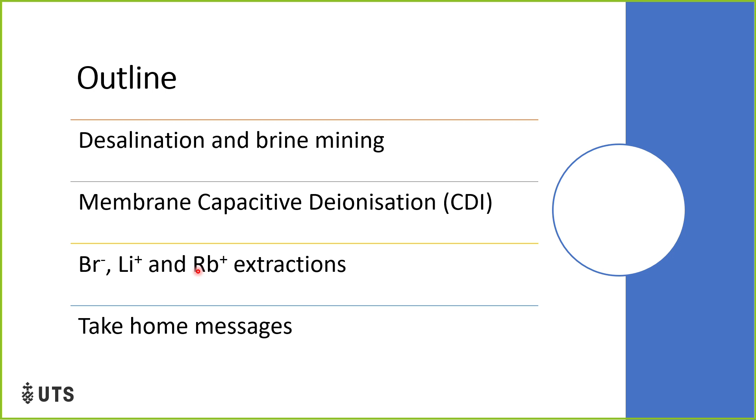Everybody knows seawater is a reliable water, food, mineral and energy resource. We have a lot of salt dissolved in this seawater. Seawater also functions to maintain oxygen levels of the air - a lot of people mention the Amazon as one of the lungs contributing to oxygen concentration, but seawater, because of the seaweed, contributes more than 60-70% of the oxygen. So seawater is very important for our CO2 balance, as well as providing a lot of benefit to our lives.

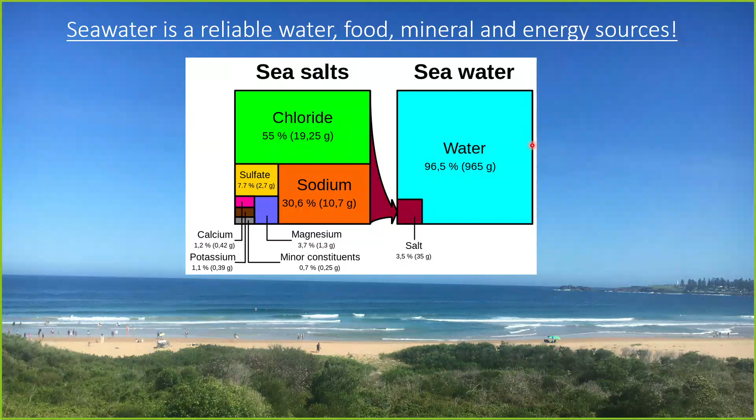If you look at the concentration, sodium chloride is followed by calcium, magnesium, sulfate, and a lot of minor constituents. So the question is how we can recover this material and also desalinate, which is one of our sustainable water resources.

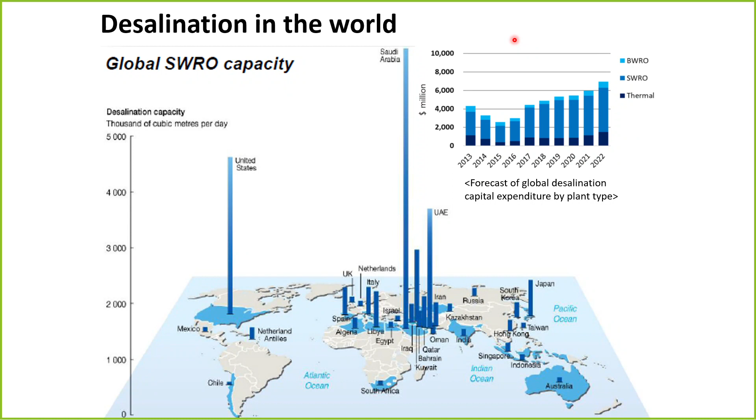If you just save 1 kWh, it will really impact our overall CO2 emissions as well as energy consumption. So there is a lot of effort to develop more sustainable and cost-effective desalination. And if you have a desalination plant, there is seawater and seawater brine left after the water is desalinated - so there's still a lot of leftover material.

Sodium, calcium, magnesium, and different monovalent ions are in brine. This brine can be mined and converted to useful material. The brine water can simply produce calcium carbonate, and these can also be separated with nanofiltration technology, which can separate multivalent ions from monovalent ions, allowing us to recover magnesium hydroxide.

There are also a lot of useful materials like indium, vanadium, and gallium, and we can collect these useful elements from brine. We can utilize polymer inclusion membrane selective separation, 3D adsorption modules, and solvent extraction methods. Ionic liquid can also be used.

If you look at the monovalent ions, we can use advanced multi-effect distillation to get further desalinated water, and then the remaining monovalent ions can be extracted further using solvent extraction, polymer ionic membrane and 3D adsorption modules, and electrodialysis with improved ion exchange membranes. Ultimately, we'd like to collect rubidium, boron, lithium, and other byproducts.

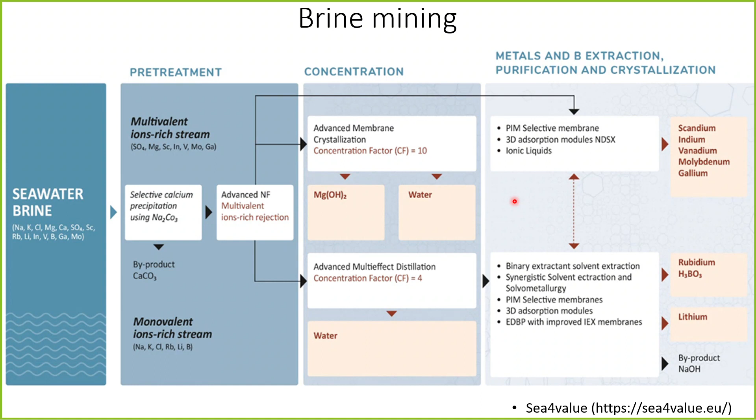We can collect useful elements from brine, which gives extra income from the desalination plant, so that we can cover some of the very huge expensive capital and OPEX costs. So if you look at the detailed minerals, which kind will be more cost effective to recover?

This red zone shows rubidium, lithium, bromine, and magnesium are the most viable elements to collect from RO brine. In particular, magnesium is very simple compared to other monovalent ions because it can be separated by nanofiltration. Sodium, magnesium, and different ion balances can be separated by nanofiltration membranes.

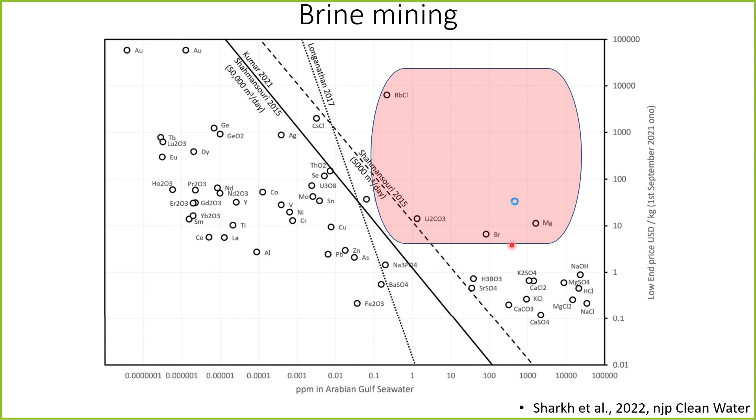I don't want to discuss nanofiltration in detail. This nanofiltration separation has already been commercialized by Neom, and they are actively collecting this magnesium compound. Today I'd like to focus on rubidium, lithium, and bromide, and how we can recover these three elements using membrane capacitive deionization.

So briefly, let me introduce capacitive deionization. This is an emerging technology, highly suitable for low salinity conditions, relatively fast process, efficient removal of charged ions, ideal for decentralized small-scale systems. We have a graphite sheet and carbon electrode, which is powder activated carbon, and a spacer, which is the water channel, along with an electrode and a graphite sheet.

We apply direct current, plus to minus, and then you can separate your ions. This is membrane capacitive deionization. We just attach the cationic membrane and anionic membrane to pass through ions, and positive and negative ions can be collected from this electrode using very low voltage and low pressure, chemical free, and this can be separative, and we can also have a desorption stage.

Using short circuit and reverse polarity, or chemical pre-process and energy recovery, we can also focus on resource recovery, achieved through this MCDI system. There is a lot of research going on to develop better electrodes, such as carbon aerogel, graphene material, or MXene, which can be utilized as good electrodes.

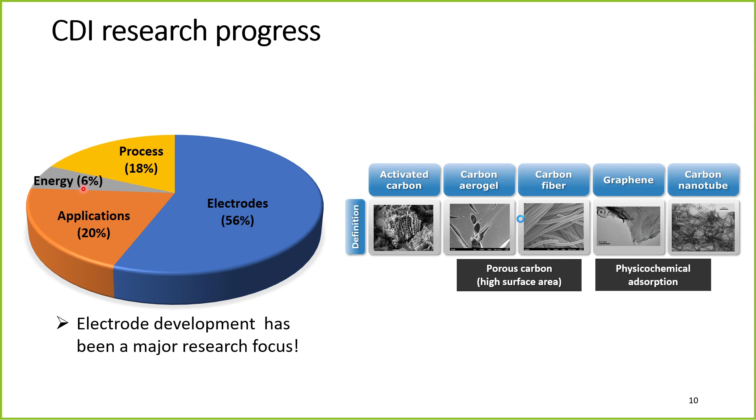Also on the application side, there's focus on energy saving as well as process improvement. This is the application: people try to apply it to brackish water, to make drinking water quality less than 500 milligrams per liter. Also water softening to remove some of the calcium and magnesium, and to remove arsenic.

Some contaminants like arsenic, or specifically nitrate in groundwater, are less tedious, but the problem is that toxic heavy metals and nitrate compounds can only be removed specifically using this MCDI technology. So this is the more cost-effective process.

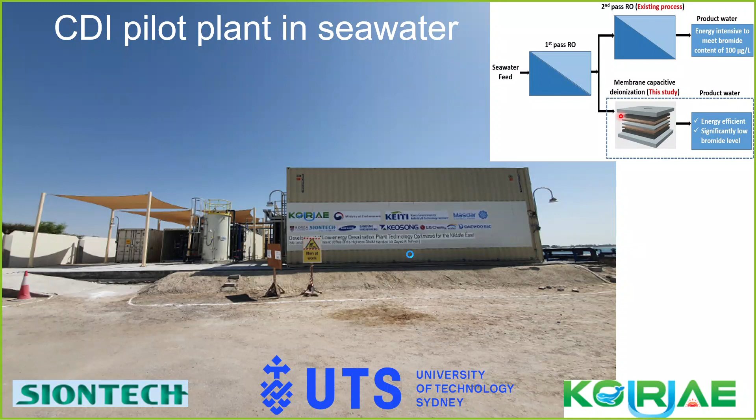We collaborated with a Korea project to demonstrate seawater desalination after the first RO pass, connecting with the second pass RO. This is the general RO process, and we tried replacing this second RO pass with MCDI, saving almost 0.3 kilowatt hours per cubic meter, a huge amount of energy. We demonstrated this at 1,000 cubic meters per day of energy-efficient desalination in the Arab Emirates, and successfully installed and demonstrated this process.

We are also helping bring this MCDI technology with solar panels to Tuvalu. Tuvalu is located in this area, and they have significant impact from climate change and sea level rise, with seawater penetrating the groundwater, so drinking water is not enough.

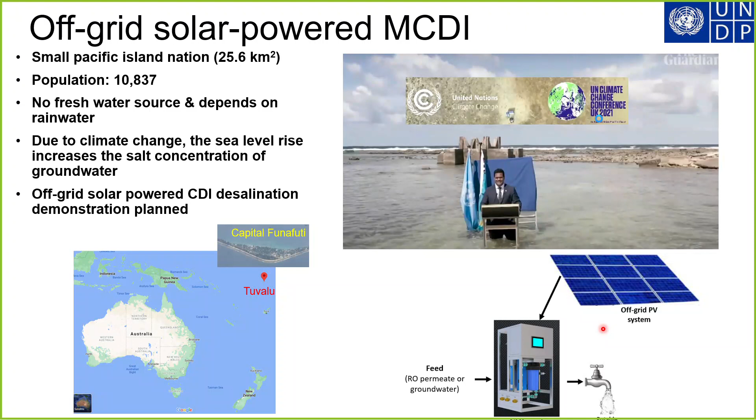So we try to connect PV panels with seawater RO and CDI process to provide carbon zero desalination technology. And the first challenge, as I mentioned, I tackled the three element recovery in this study.

The first one is the bromide. We have published around 10 papers over the last 7 years to recover this bromide. The bromine market is valued at USD 3.6 billion, growing 5% between 2021 and 2026, and will reach 4.5 billion by 2026. It's mainly used in dye production, flame retardant, pharmaceutical, agriculture chemical, insecticide, and pharmaceutical chemical intermediates, so there's a huge amount of bromine utilized.

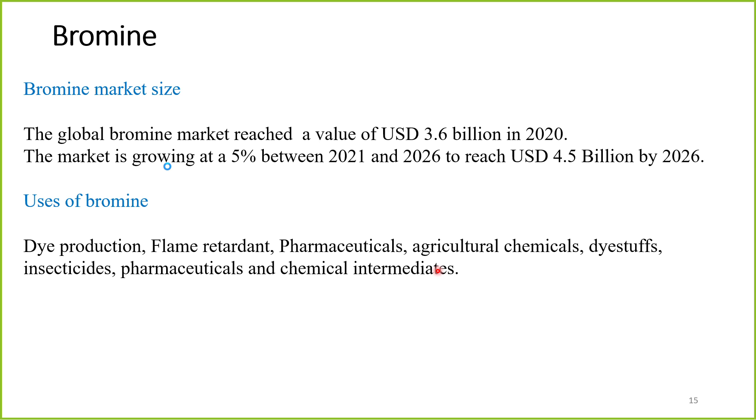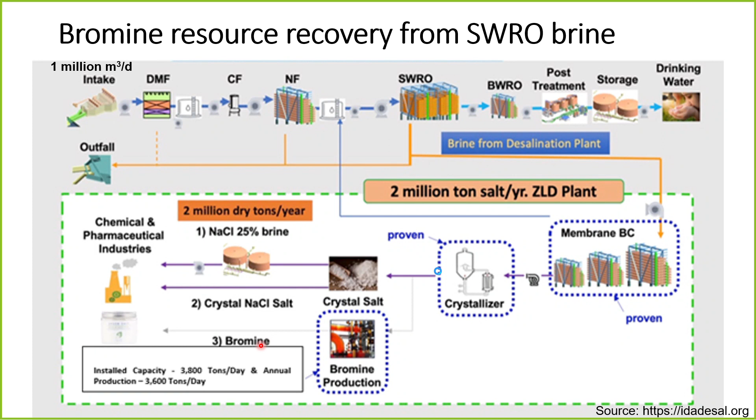So what we try to do is recover bromine at this stage. This is the schematic from Neom City - they'd like to commercialize this technology. First they want to collect 1 million cubic meters per day of seawater intake, with pre-treatment nanofiltration to recover divalent and trivalent ions, while monovalent ions pass through the seawater RO, BWRO, producing drinking water. At the same time, they collect the divalent and some monovalent ions to pass through a membrane brine concentrator and crystallizer to collect the bromine - almost 4,000 tons per day, a huge amount, but they still have technical issues effectively recovering it. So we tried to combine our MCDI to improve bromide removal.

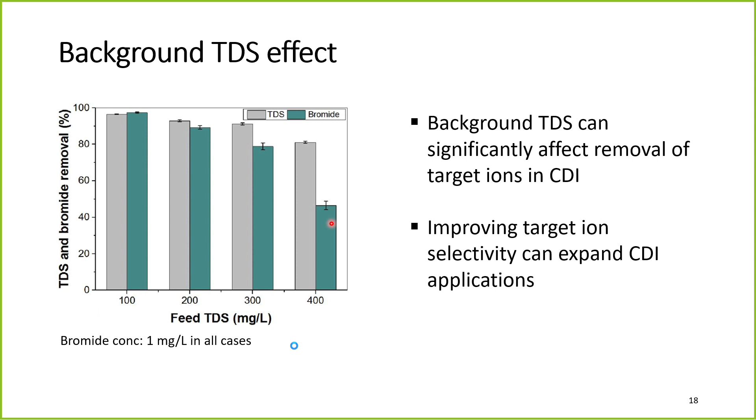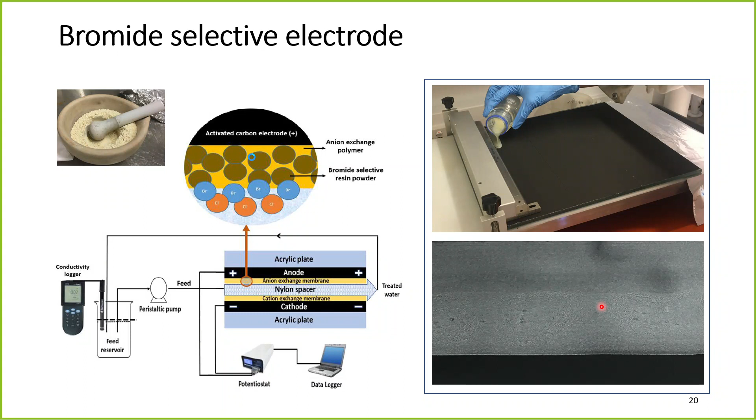Looking at the TDS effect: when you increase TDS concentration, your bromide removal decreases when the background water is more salty. So we developed a way to specifically select bromine, combining our activated carbon electrodes with a bromide resin, covered on top of our ion exchange membrane - anion exchange membrane polymer plus bromide selective resin mixed together to produce an electrode with bromine selective compound. We tested the stability, and this MCDI shows very good stability. Now look at the bromide adsorption.

Bromine versus bromide: if you oxidize the bromide, you can convert it to bromine. Br minus converts to Br2, so you can collect bromine through chlorination. That's the reason why in seawater it's present as bromide.

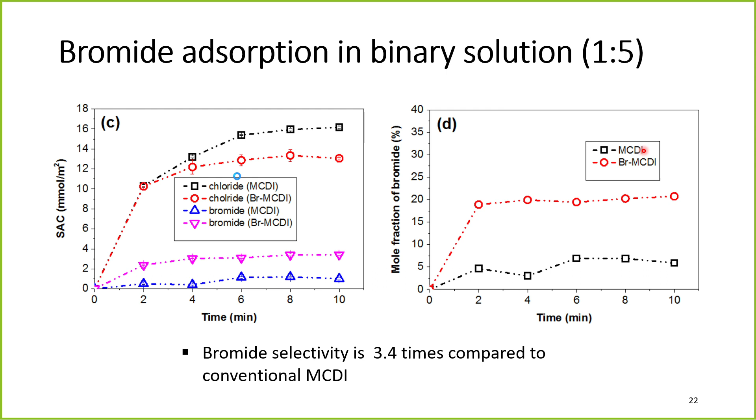So we need to first recover this bromide. Looking at chloride and bromide, this is without any bromide MCDI component versus with the bromide MCDI. You can see the normal MCDI in blue, and the bromide MCDI in pink. Overall, bromide selectivity is almost 3.4 times higher than normal MCDI - we've increased our overall bromide selectivity using the bromide MCDI.

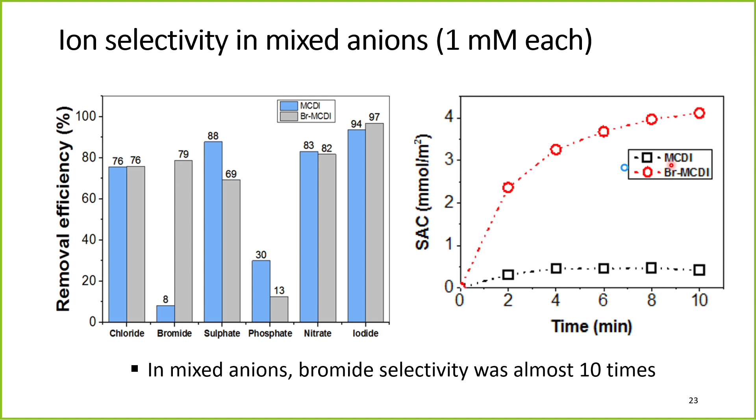We compared chloride, bromide, sulfate, nitrate, and iodide - bromide selectivity was almost 10 times higher compared to normal MCDI. So that's what we developed for bromine recovery, and we're trying to move toward more real water sample testing.

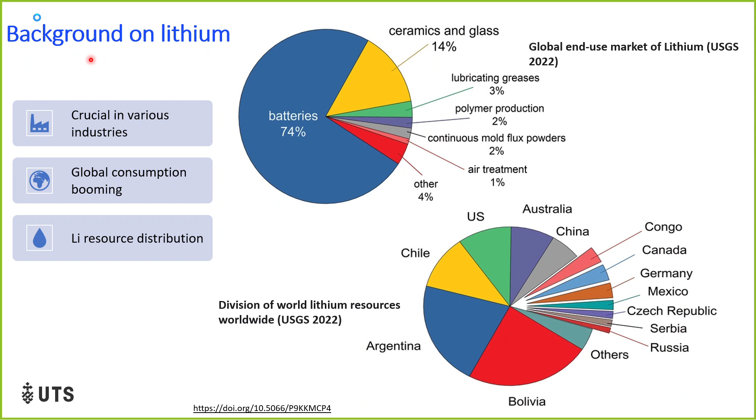Next challenge is lithium. We've also worked in this area for the last 5 years to recover lithium from seawater. I'll skip the general background of lithium and lithium inland exploration - Chile, Argentina, and other countries have a lot of lithium on land, but only 22 million tons. However, in seawater, lithium concentration is almost 0.2 milligrams per liter, which amounts to 230 billion tons - almost 10,000 times more lithium contained in seawater.

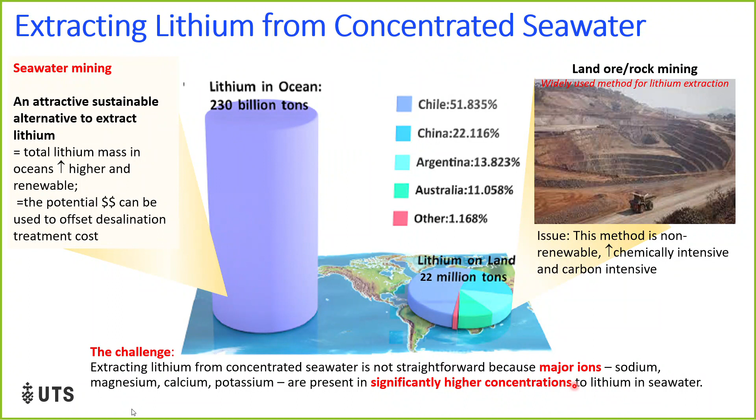So what's the challenge? Extracting lithium from concentrated seawater is not straightforward because major ions - sodium, magnesium, calcium, potassium - are present in significantly higher concentrations than lithium in seawater. So how can we selectively collect this lithium?

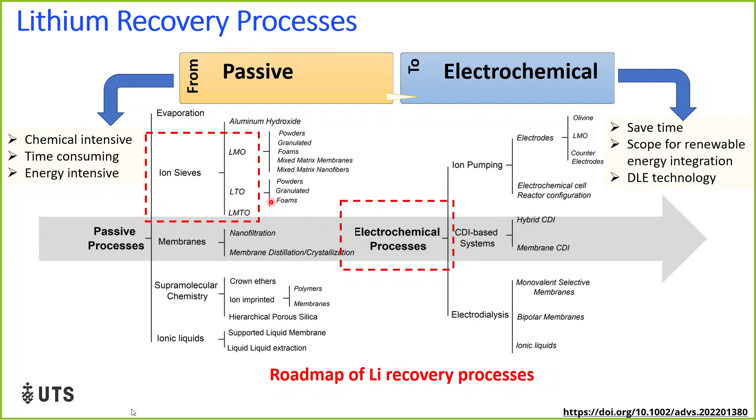We investigated some technologies: lithium manganese oxide, titanium oxide, manganese titanium oxide ion sieving methods are commercial technologies. Electrochemical processes like MCDI or hybrid CDI can also be utilized. We'd like to combine these two technologies to effectively collect lithium compounds.

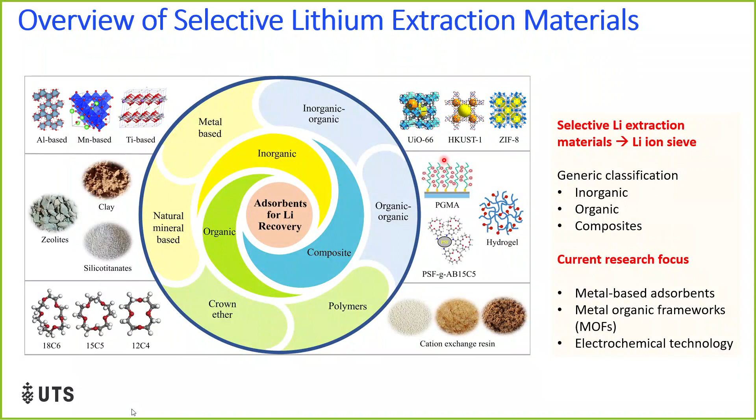Looking at ion selective lithium materials - inorganic, organic, polymer, crown - these are natural materials. Different materials can be more selective for lithium, especially UiO-66, HKUST-1, ZIF-8, which have very strong adsorption capacity for lithium in seawater. This is our commercially available lithium ion sieve method.

So if you see the lithium ion selective structure, the hydrogen can replace with lithium, and then lithium can also replace with this hydrogen. So in your lithium ion selective absorbent, you can simply exchange your hydrogen with lithium so that you can have more high concentration of lithium from this lithium ion selective absorbent.

So aluminum based, you have a very strong merit for this performance. Then selectivity wise, manganese lithium oxide has a very strong selectivity, and titanium lithium adsorption capacity has a very strong performance from these three metal absorbents.

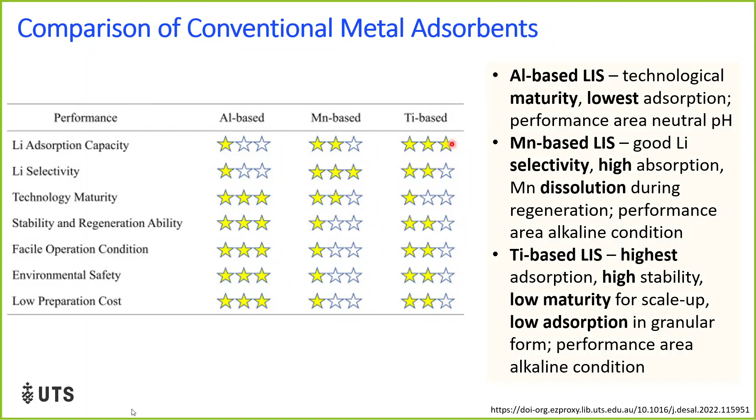So we have developed a MOF-based electrode for selective lithium recovery from aqueous solution by using an MCDI system. This study was published this year, both papers, so I want to share this result.

So we covered our material ZIF-8 on top of the activated carbon and tried to selectively pass through only lithium ions through this cationic ion exchange membrane and ZIF-8, and that's how we can have a more selective lithium concentration. So we compared with different ions - ZIF-8 material coating based on the previous absorbent, which has a very high selectivity - to see how we can have a good electrosorption method.

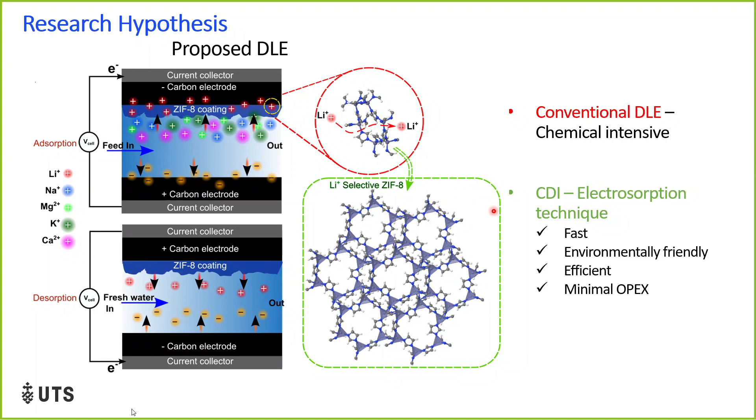So we have tested this basic MCDI setup. This is the activated carbon, powdered activated carbon, and this is our ZIF-8 grown in situ on top of this activated carbon. You can see the activated carbon and ZIF-8 coated electrodes, and we put the cationic exchange polymer, and then we create the ZIF-8 polymer membrane coated electrodes. So this will perform different tests.

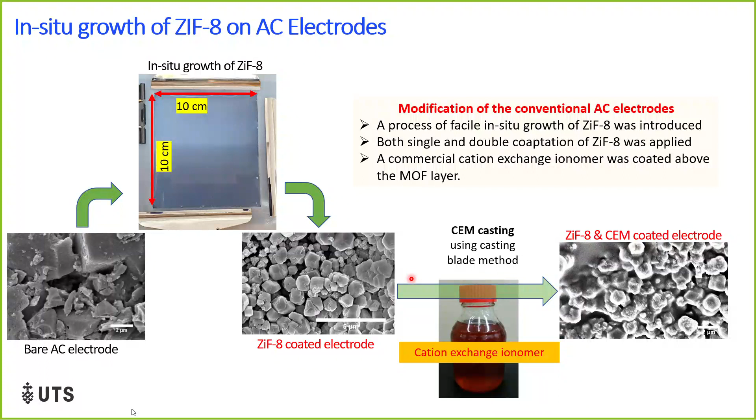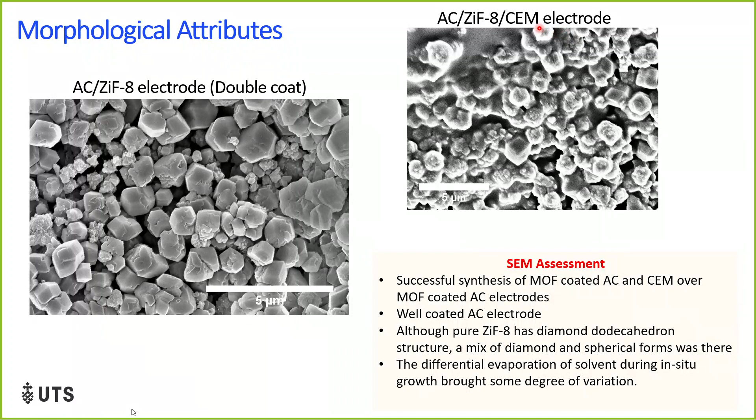This is the first scenario. Second scenario is the ZIF-8 we incorporate on top of activated carbon. Third scenario is that we put only the ion exchange membrane, and then ZIF-8 and ion exchange membrane.

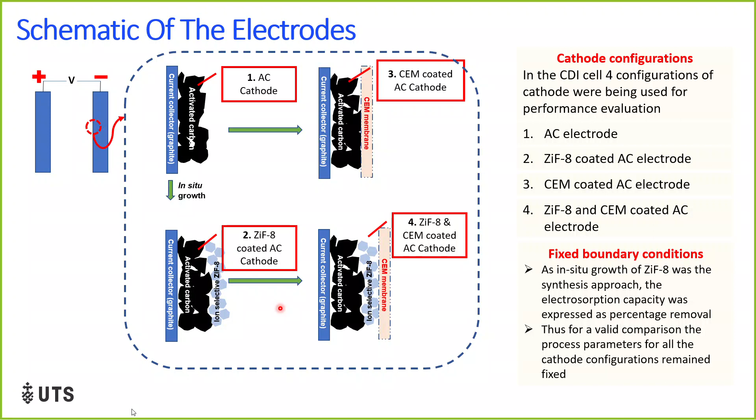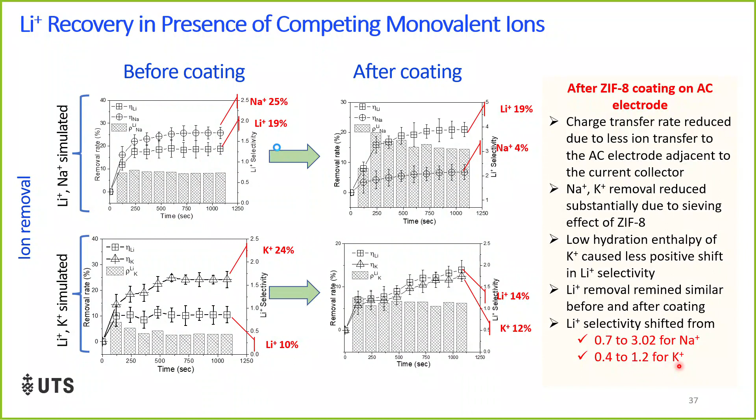So in the first scenario we compare how much we can improve the overall lithium selectivity using this MCDI. So before coating and after coating, we compare the different lithium, sodium, and potassium removal. We found out overall the lithium selectivity shifted from 0.7 after coating, and we found 3 for sodium and 0.4 to 1.2 for potassium. So we have increased the overall selectivity of the lithium from this MCDI.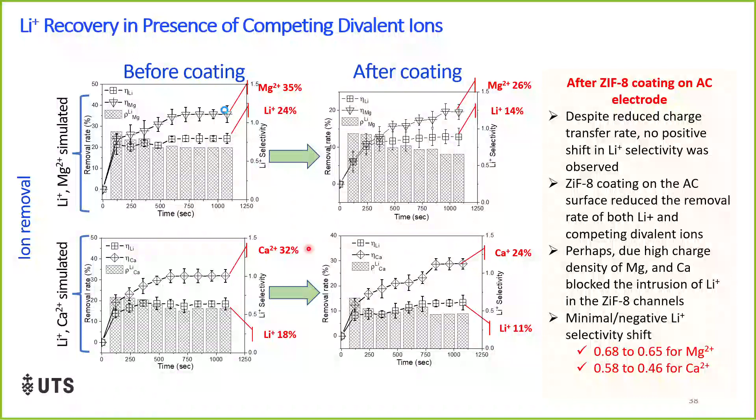Also, we compare with the monodivalent ions magnesium and calcium. So it changed to 0.68 to 0.65 and 0.58 to 0.46. So when you have divalent ions, lithium selectivity was not really high compared to the overall monovalent ions.

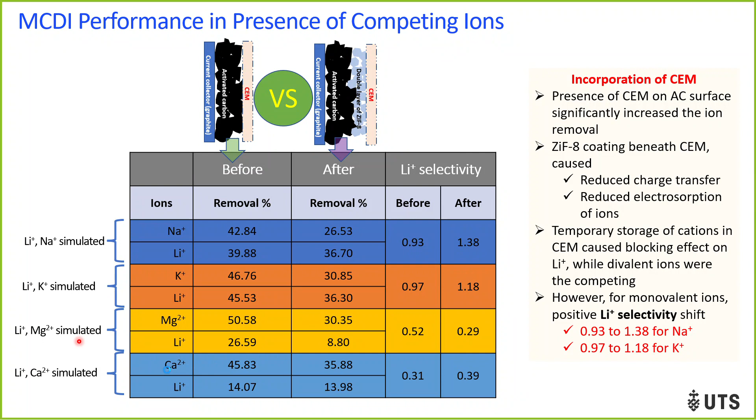So this is the summary of the competing ions: with lithium and sodium and lithium potassium, selectivity increased, but with magnesium and calcium overall it decreased.

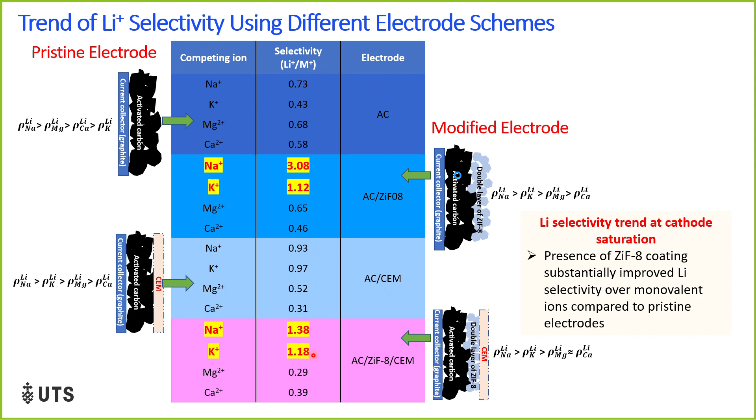So we also compare scenario 1 and scenario 2 and scenario 3 and scenario 4. Overall we have increased selectivity with sodium and potassium in general when you have ZIF, and then 1.18 when you have this cationic membrane on top of ZIF and activated carbon, 1.38 and 1.18. So when you have ZIF, it has better selectivity.

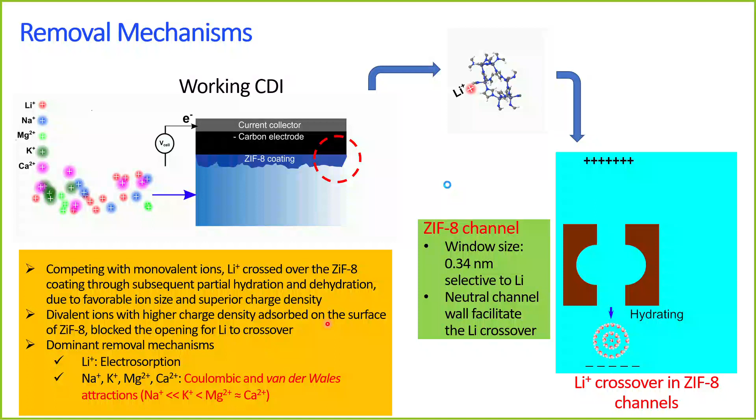Based on these two elements, we also look at rubidium. How much rubidium is inside seawater is around 0.2 milligram per liter, which is very similar to lithium concentration. So how can we collect this rubidium from seawater?

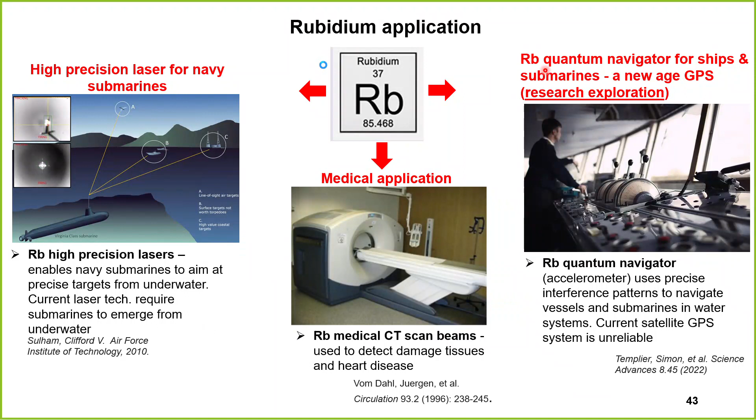So there is a good use of rubidium application with high precision lasers for naval submarines, medical applications, CT scans, and rubidium quantum navigators for ships and submarines. That's the reason rubidium is becoming more and more a critical mineral, because they can use it in many different advanced high-tech applications. The problem is there is no such land or rock mining of rubidium, and mostly they are attached with some of the ore.

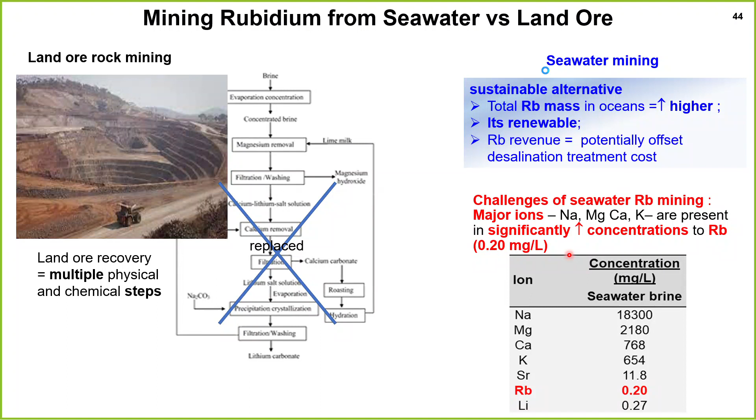That's the reason why you cannot collect a huge amount of the rubidium compound. On the other hand, for seawater mining, rubidium concentration is 0.2 milligram per liter, which means 2,300 billion tons of rubidium is contained in seawater. So how can we collect this rubidium from seawater?

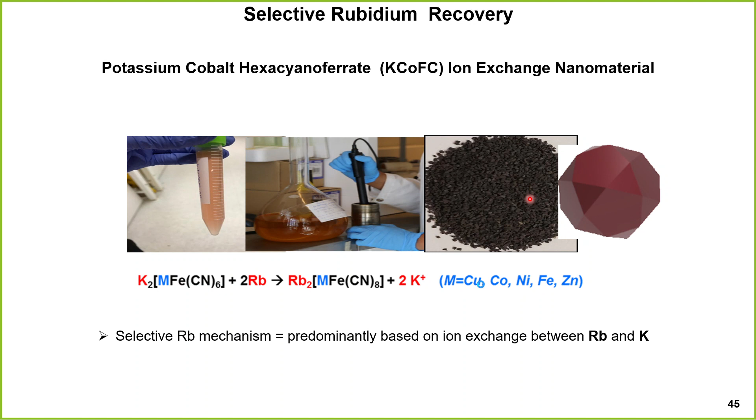We like to introduce this selective rubidium recovery using potassium cobalt hexacyanoferrate ion exchange nanomaterial. In this material, potassium can be replaced with rubidium via an ion exchange mechanism, so we have developed this KCOFC, and then look at how much rubidium can be recovered from seawater brine.

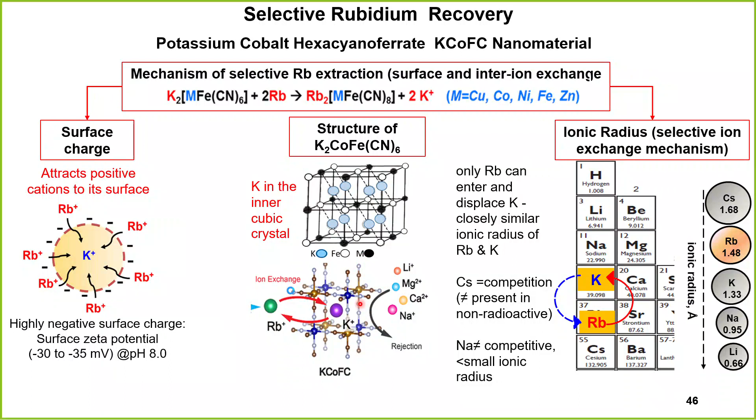This is the structural image, and we have also looked at ionic radius material. If you look at rubidium and lithium, they are our target compounds. The radius size is 1.48 for rubidium, and lithium is 0.66. So we measured the basic absorption experiment, and you can see the rubidium absorption capacity is almost 100 milligrams per gram, which is good capacity for this absorbent.

When you increase the sodium concentration, your rubidium recovery decreases a little bit, around 10 to 15%, but it's still a manageable level for your lithium compound.

We compared the recovery with lithium-rubidium, rubidium-magnesium, rubidium-potassium, and rubidium-seawater. For rubidium-potassium, when you have a replacement with rubidium and KCOFC, your recovery is relatively low, and after regeneration, we also have to effectively remove this potassium. So potassium and rubidium separation will be one of the challenges to utilize this process.

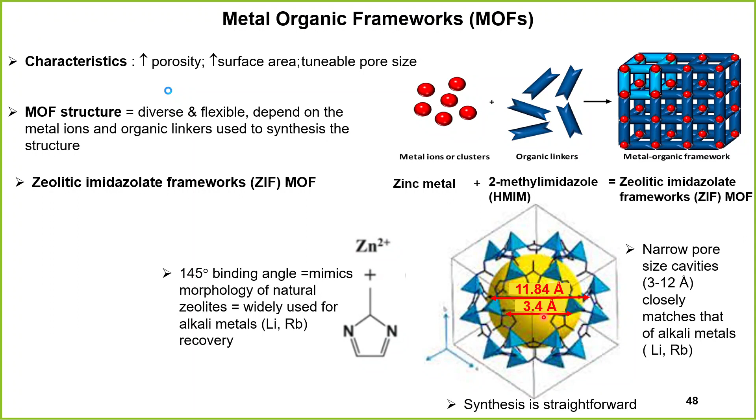You can see how this metal organic framework can improve the overall KCOFC. This material incorporates both compounds. Based on our experience, the ZIF material has a very specific channel to pass through the rubidium, which is very similar in ionic size, which we try to maintain. We have combined the KCOFC with this MOF compound, especially ZIF, to improve the overall recovery of rubidium compound in seawater.

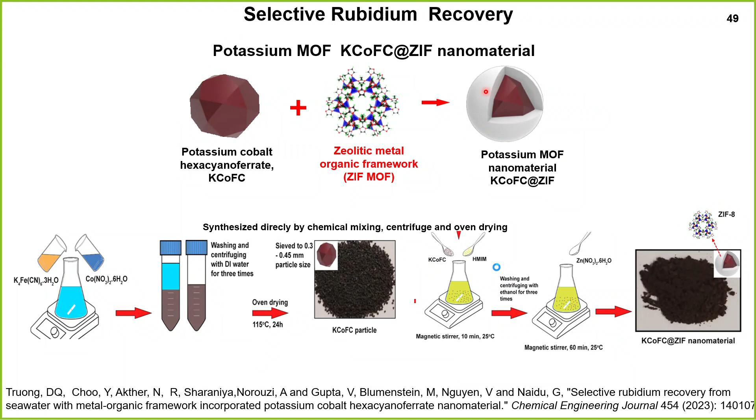We combined them together and let them absorb on the surface of this KCOFC, and then tested this compound - how much for KCoFC versus KCoFC with ZIF. The rubidium compound results are both relatively good. When you look at rubidium uptake capacity in seawater, overall KCOFC surrounded by ZIF shows almost 8 times higher rubidium uptake compared with ZIF only.

ZIF only just passes through and cannot keep it inside the FC material. So that's how we utilize the overall KCOFC combined with ZIF material to improve the overall recovery of rubidium.

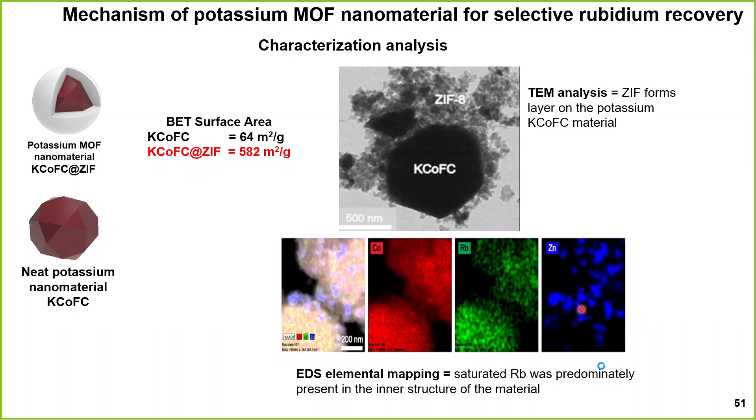This is the TEM image of the KCOFC. We have coated it with this ZIF material surrounding it, and found out what kind of compound is well distributed in this design of the nanomaterial. We successfully replaced potassium with rubidium, achieving a better recovery rate.

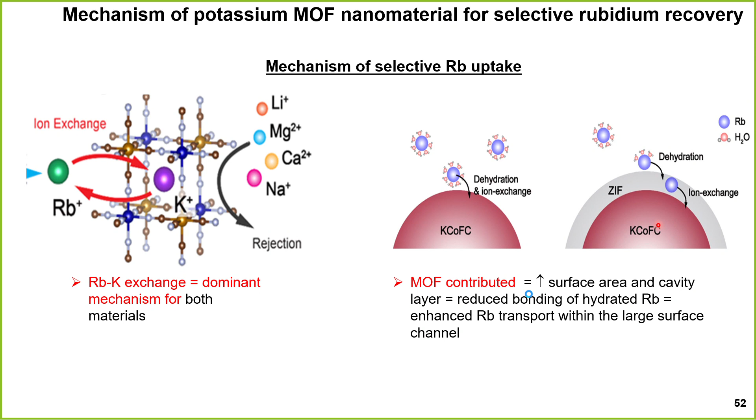With KCoFC and ZIF, when rubidium in hydrate form passes through the ZIF, it dehydrates and replaces the potassium, which is discharged, and the rubidium is stored in this nanomaterial. That's what we developed, and then we tried to create polymer encapsulation to apply for the seawater brine column test.

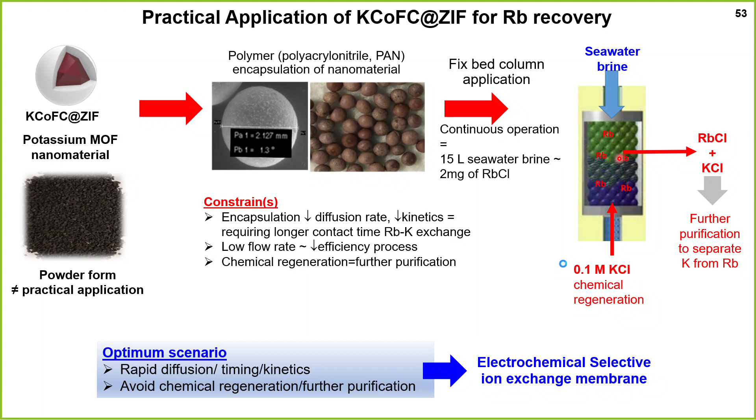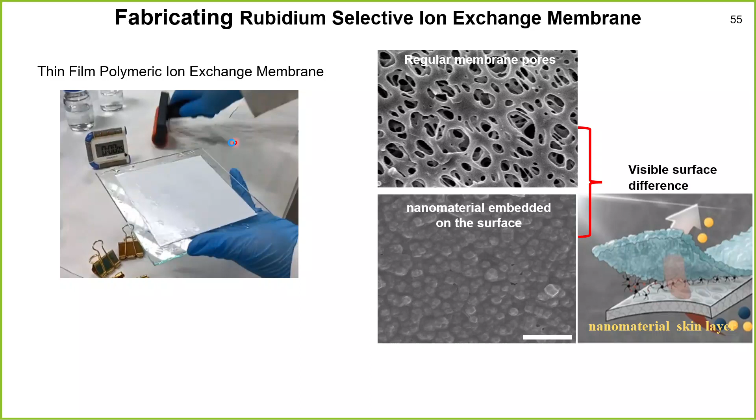We have successfully utilized this absorption-desorption test. The next step is we want to have a spec membrane with this MCDI technology. We want our polymer with this KCOFC and MOF material combined with our cation exchange membrane, so we can have selectivity for rubidium and a better way of regeneration.

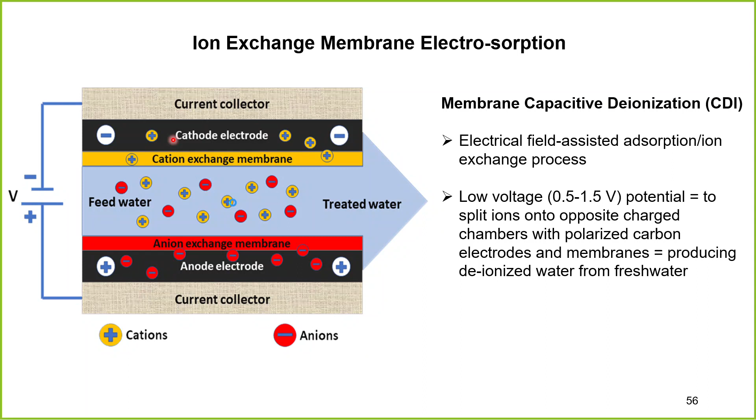When you use simple adsorption-desorption, you have a potassium problem, so we need additional separation processes. But if we use the MCDI, we can directly adsorb the rubidium and then dissolve this rubidium compound. That's what we are trying to develop with this material.

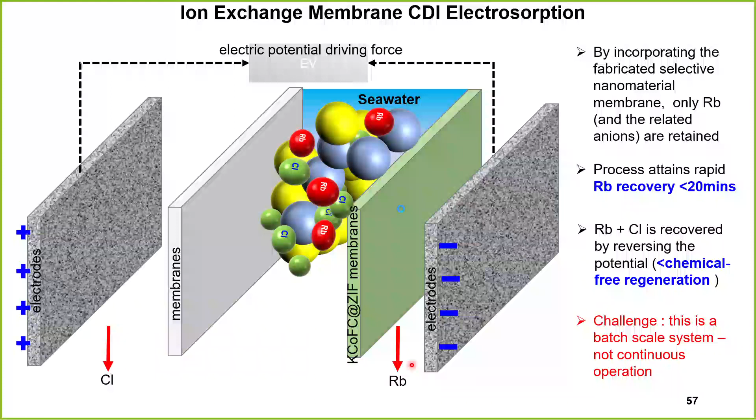This is the seawater and KCoFC@ZIF membrane, and then rubidium compound only can pass through this flow CDI system. So FCDI can continuously create rubidium concentration, which is a very high-valued material using this FCDI process. So you want to combine this with the flow system for a continuous system, and then we can collect the rubidium.

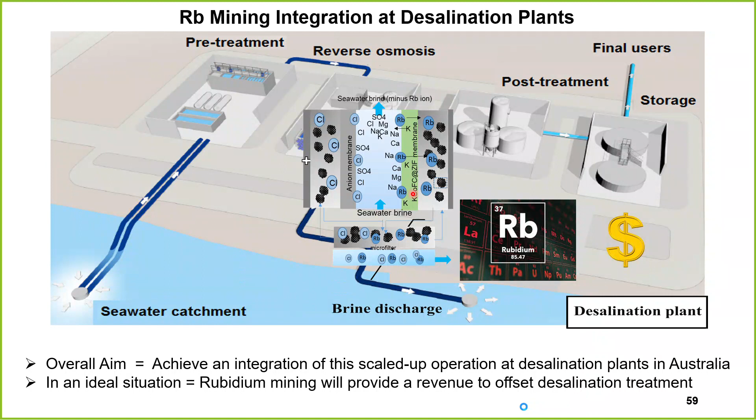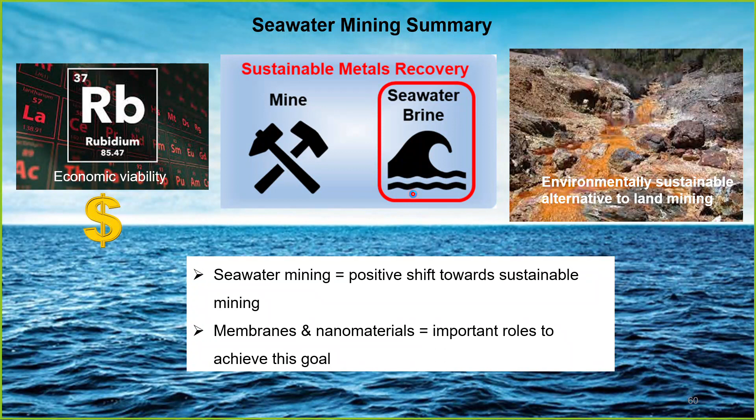Also, we are trying to develop lithium as well, which can be used as a critical mineral, and that's what we are planning to do for seawater mining with the nanomaterial and then the compound using an electrochemical process.

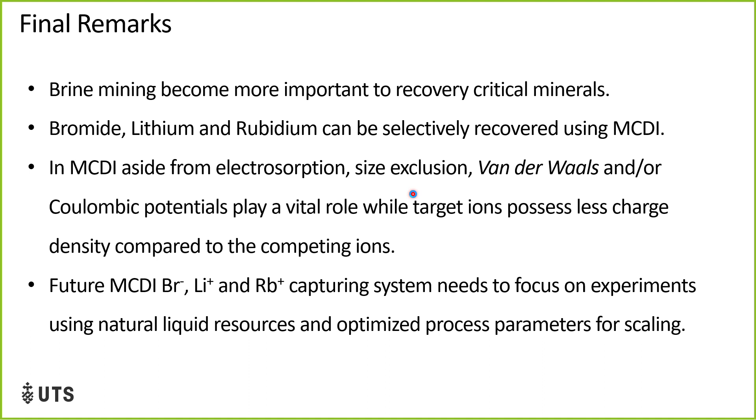So final remarks: brine mining becomes more important to recover critical minerals. Bromide, lithium and rubidium can be selectively recovered using MCDI. MCDI has very useful electrosorption mechanisms - size exclusion, van der Waals, and Coulombic interactions play a vital role - while the target ion possesses less charge density compared to the competing ion. So future bromide, lithium, rubidium capturing systems need to focus more on larger scale, as well as optimized processes that can be developed to make commercial opportunities in the future.

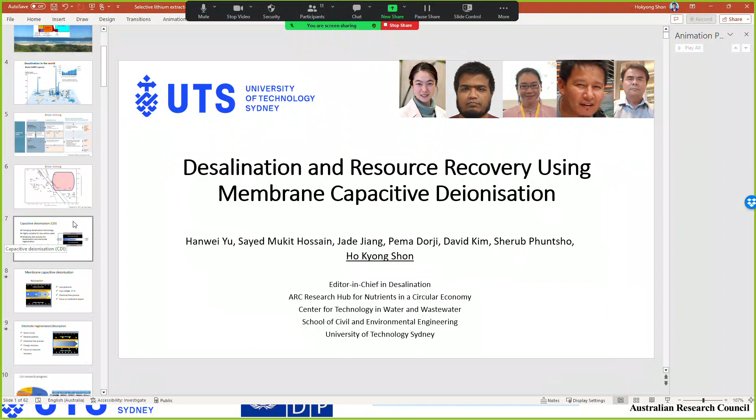So don't worry about only one technology, we can use this MCDI. Yes, you can, but depending on your water quality, we can utilize several separation technologies to achieve a higher concentration of your overall targeted ions. Thank you. Any other question from the audience?

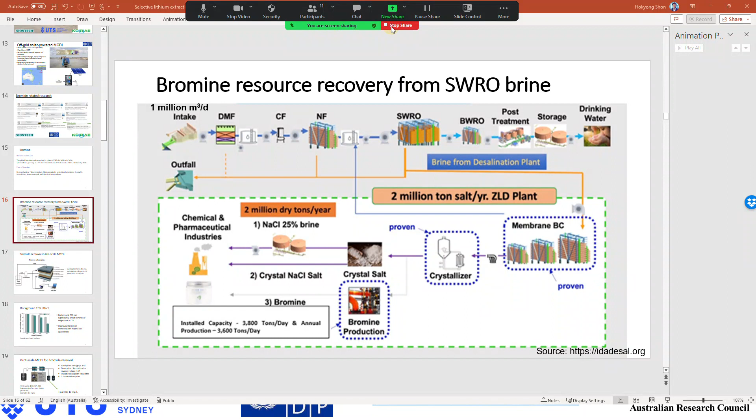Okay, Professor Shon, I have just a very small query. As I understand from your presentation, the resource recovery, especially with respect to bromide, lithium, rubidium type of elements which are very crucial, has been attempted at pilot stage at your site, right? So have you been able to do some life cycle analysis of these processes so that we can bring them into the commercial domain?

That's a very good question, which is always the problem of real commercialization opportunity for every cutting-edge technology. What happens is life cycle assessment has to be done - even though you have a very good life cycle assessment, techno-economic analysis, and a lot of benefit to your technology, the problem is the supply chain. At this moment, we have an established critical mineral supply chain system that we have to compete with - the traditional supply chain.

For example, we produce a lot of salt from seawater brine. However, even though we produce a lot, the existing traditional way of producing sea salt already has its own supply chain, so we have to compete with that. And this critical mineral issue is the same.